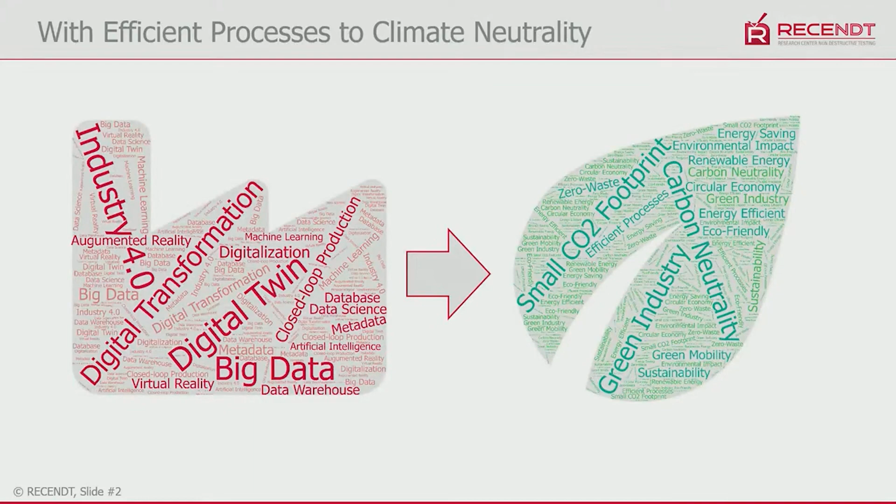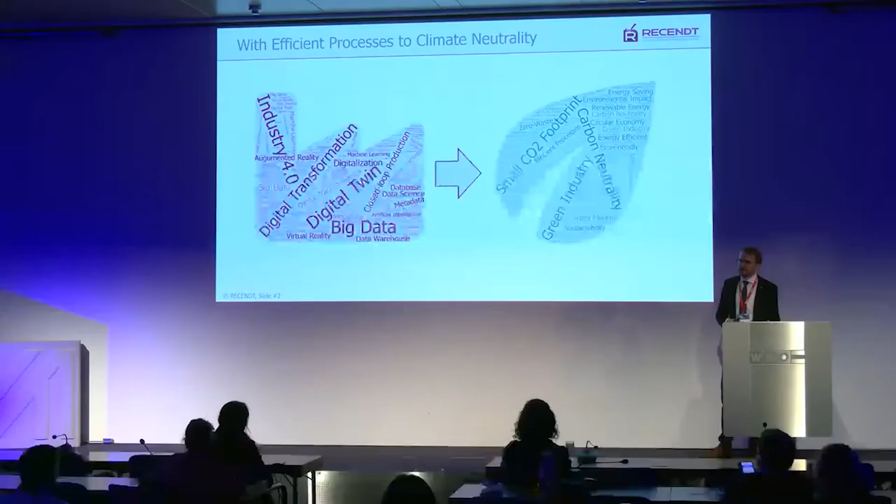In the next few minutes, I'm going to talk about contactless sensing technologies for enabling efficient process control. First of all, you probably heard from the last presentations and from the presentations from today several keywords from digital transformation, big data, regarding the industry, but regarding climate neutrality, you heard probably carbon neutrality, green industry, small CO2 footprint, and of course, circular economy.

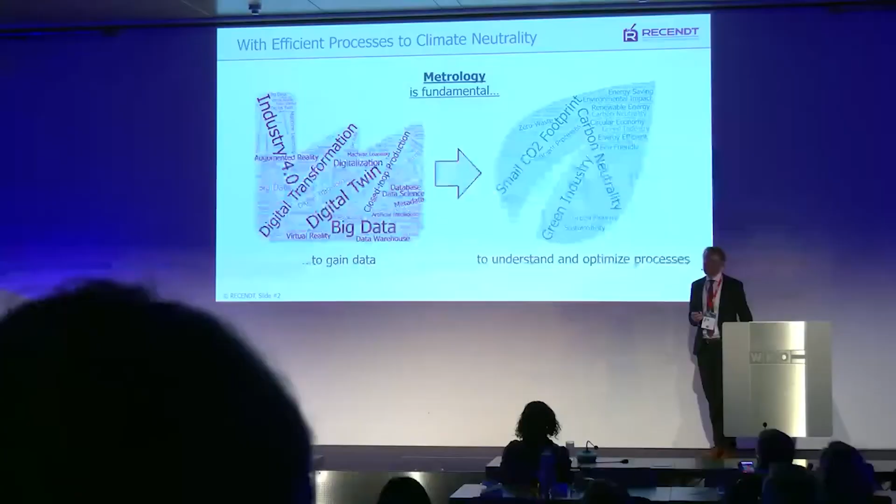And in order to reach that climate neutrality, one point is fundamental. Metrology or sensing is fundamental on the one hand to gain data, and on the other hand, to understand and optimize those processes. Our company is called RECENDT, and from the name, you already see our focus. We are a research center for non-destructive testing, a research and technology organization, non-academic,

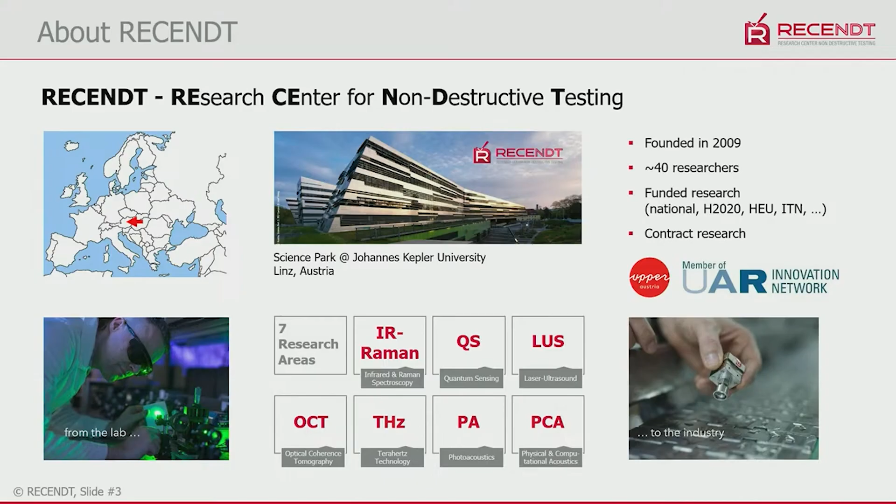which focuses on sensing technologies. We've got 7 research areas, from acoustic technologies like laser ultrasound and photoacoustics, over to optical technologies like infrared and Raman spectroscopy, over optical coherence tomography and terahertz technology. And since autumn last year, we also have a research group dealing with quantum sensing, which is quite an interesting topic. There's still a lot of research going on there, but that will be very interesting also for industry applications in the next years.

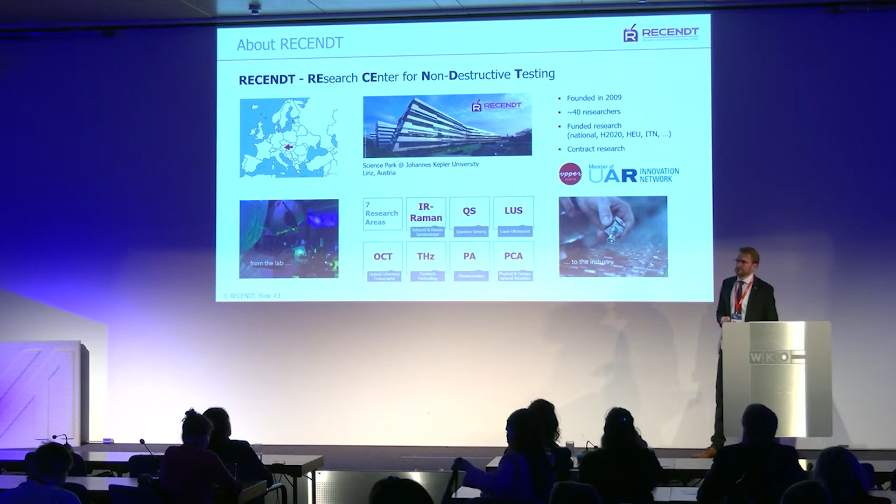Our focus is bringing those technologies from the laboratory to applications in the industry. And how to do that? Basically, we are offering quite a broad range, from proof of concept studies over R&D consulting. We're doing sensing development and prototyping in-house. We're doing the whole system integration, where we integrate our sensing solutions into your process systems in the industry. And we also offer measurement service, where you can send in your probes to our facility, and we analyze those probes, for instance, regarding microplastics.

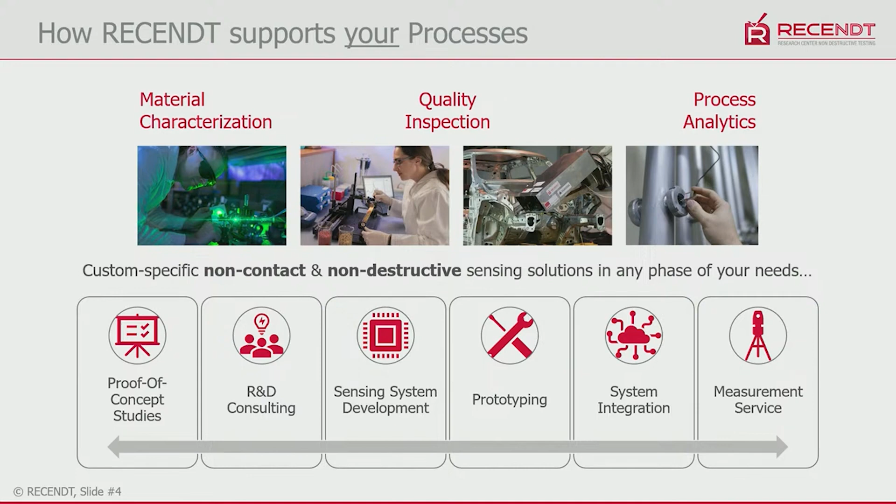As written on the top of that slide, we're dealing with material characterization, quality inspection, and process analytics, ranging from applications in a laboratory to the process itself, to inline applications, as seen on the right-hand side. But what they all have in common is they are non-contact and non-destructive solutions. Today I want to focus on one specific technology, infrared spectroscopy, since this is a key technology for inline process control and inline process monitoring.

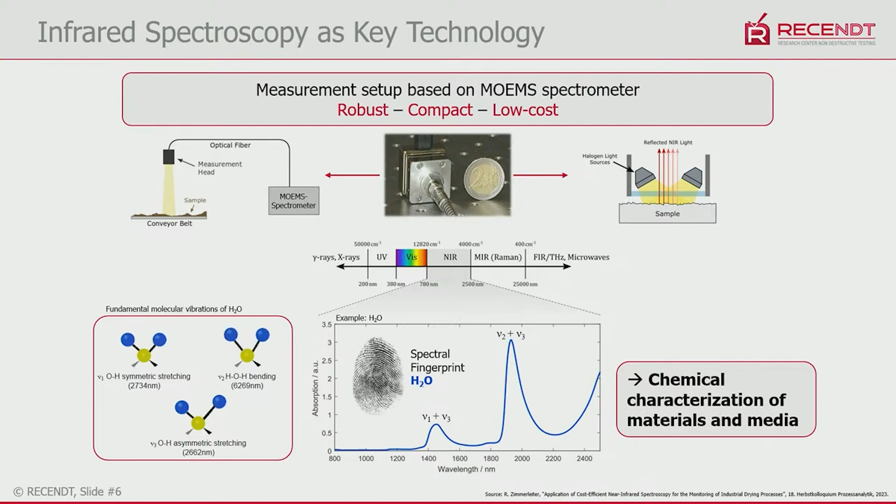Now I'm showing you some examples based on that technology. The first one is an inline monitoring of resin production, for instance for the production of melamine formaldehyde resins for surfaces or phenol formaldehyde resins for mineral wool. What we're doing here is an inline chemical characterization. At the company, in that case Metadynea, we're applying our microspectrometer downstream of the formalin tanks, and with that microspectrometer, we're measuring the concentration of formaldehyde.

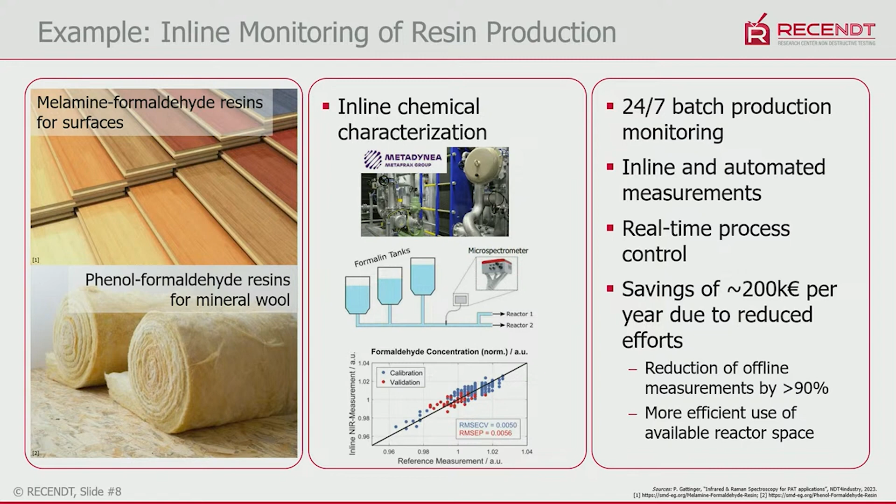Now we are able to monitor this production. That's a 24/7 batch production. Since it's inline and automated, we can also automatically do a real-time process control. With those advantages, we had a reduction of the offline measurements by over 90%, and in the subsequent process can also use the space of the chemical reactors more efficiently. With those advantages, the company was able to reach a saving of approximately 200,000 euros per year, which is quite a lot, of course.

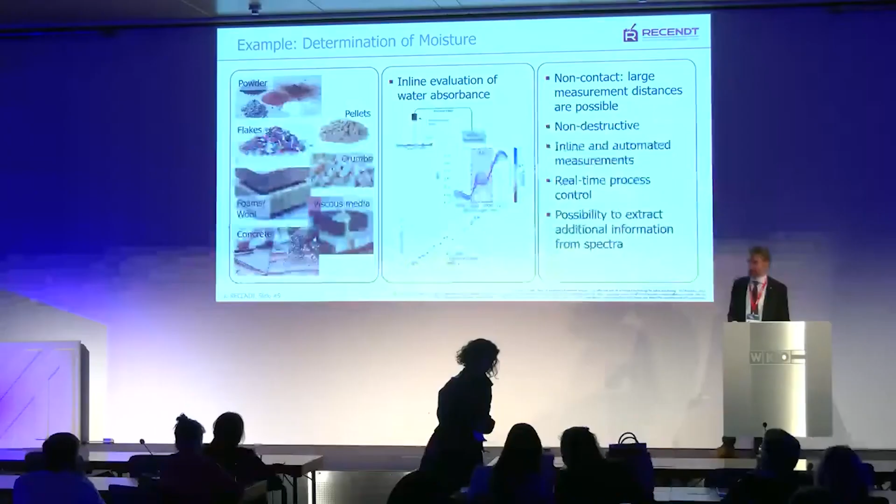We can measure that at various different media, from powder over pellets, flakes, crumbs, foams, or wool, but also viscous media, or for instance concrete. The big advantage is we are non-contact and non-destructive, so large measurement distances are possible. With this small measurement head, it's also possible to do that inline and automatable. You can use that data for real-time process control.

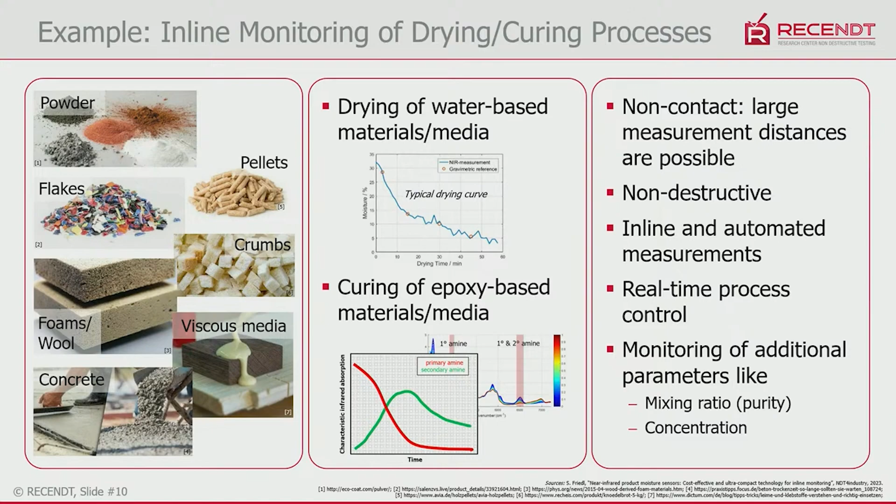That can be done for water, for drying processes, but we can also do that for curing processes, for instance curing of epoxy-based materials or resins, as demonstrated in the picture below. You can see the characteristic infrared absorption of the primary amine and secondary amine over time. With that data, you can determine the curing. In addition, you can also monitor additional parameters like mixing ratio or concentration with that technology.

Another example, semi-based on infrared technology, is the inline characterization of layers. We're using primarily optical coherence tomography and terahertz technology. With those technologies, we can determine the layer thickness and internal structure of various products or materials, like multi-layer films or sheets, laminates or vinyls, composites or hybrids, and multi-layer pipes.

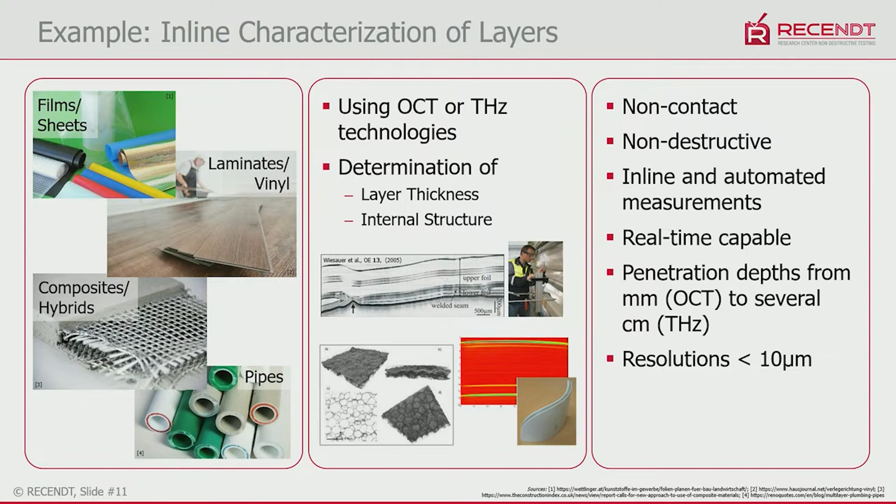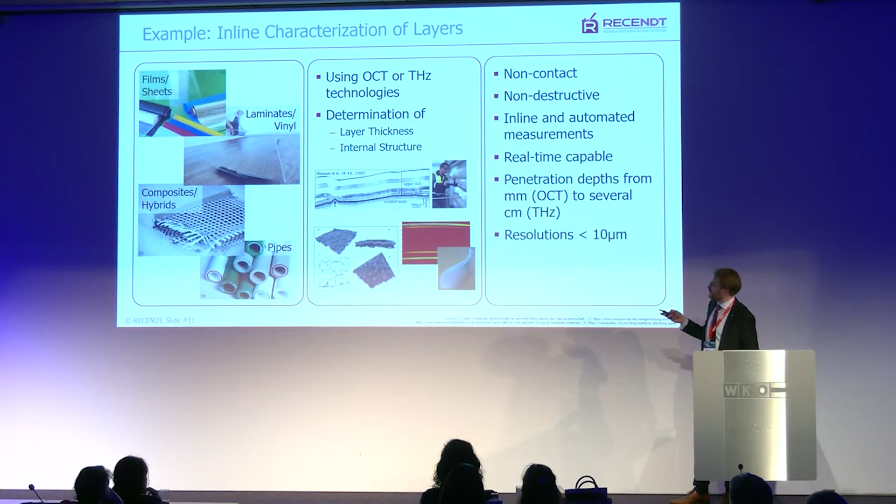Some examples are shown here, where a multi-layer foil is analyzed and you can see the structure, or here for a multi-layer pipe, or this picture where the structure of a foam is evaluated. With those technologies, we reach really high penetration depth, depending on the technology, from some millimeters to several centimeters, and really high resolutions down to some micrometers, which can be seen here in that foil. The scale here says 500 micrometers, so we can really see some very thin layers and characterize them.

The last example I want to show is the detection of contaminations. This is now an example not for inline process control, but for offline quality inspection. We can identify and characterize those contaminations by localization, chemical identification, and quantification on several materials, like soil, textiles, or foams.

Sorry, that was one page too fast. Here, exactly.

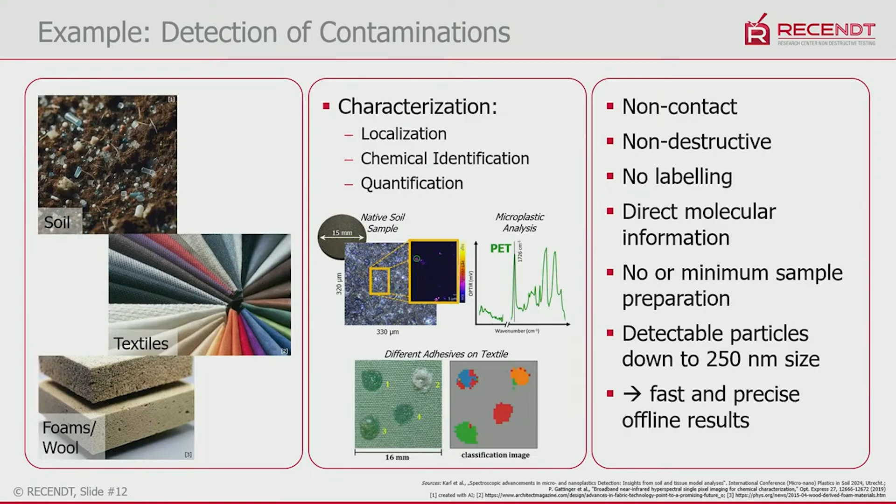One example would be the analysis of microplastic in soil. What you can see here is a soil sample, quite a small one. From that soil sample, we can look at a region of 300 by 300 micrometers. From that region, we can zoom in and see particles down to 250 nanometers.

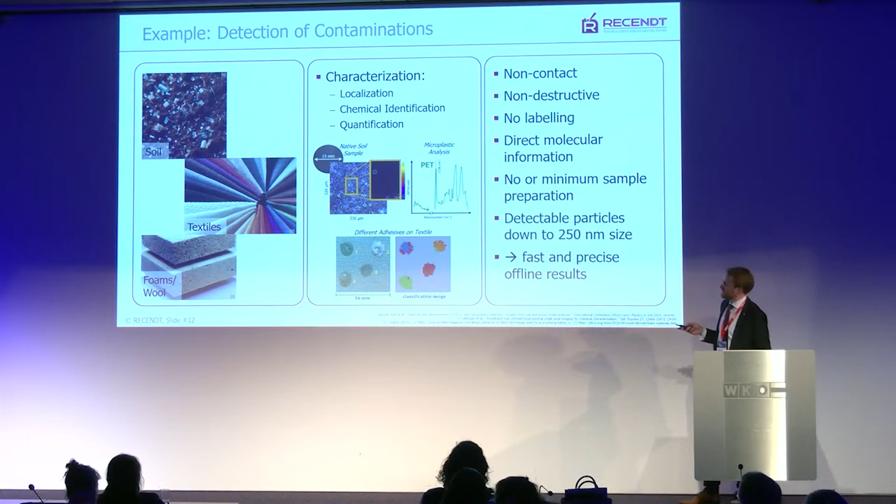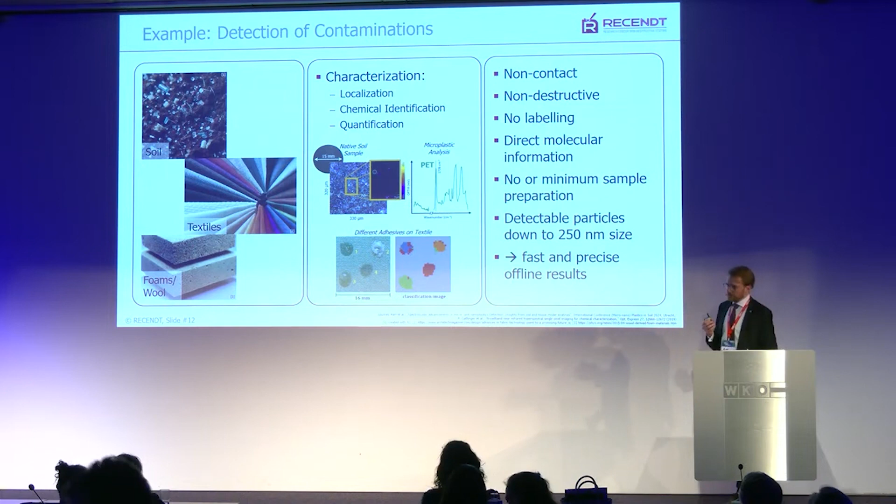We can identify which plastics are within this region. For instance, here PET is identified in those bright regions, which are quite small. Or here, different adhesives on the textile - we can identify which adhesives, localize them, and quantify how much adhesive is applied on that textile. With that technology, we are able to produce those results quite fast and precise.

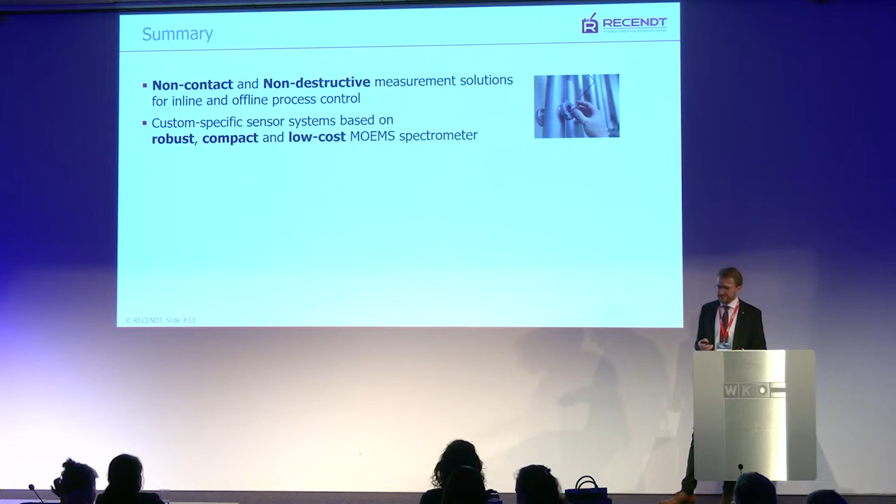So I'm already coming to the conclusion and summary of today's presentation. I showed you some examples for non-contact and non-destructive measurement solutions, mainly based on custom-specific sensor systems, built on small spectrometers which are robust, compact, and low cost. I showed some applications mainly for the chemical industry and construction industry, but these examples can also be applied in many other industries.

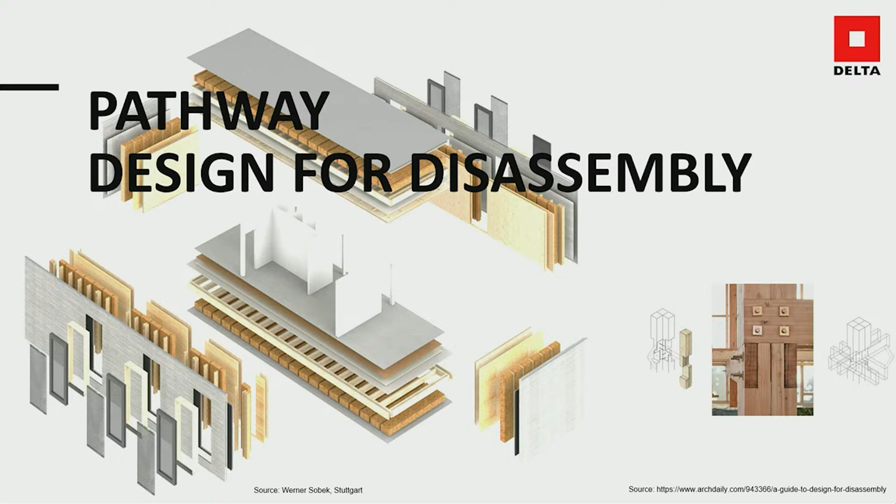Coming to challenge number 1: design and planning. Traditional construction practices are often linear, with little consideration for end-of-life material use or recycling. Shifting to a circular model requires a fundamental change in design philosophy to prioritize modularity, adaptability, and the use of recyclable materials. What is a pathway? Designing buildings and components to be easily disassembled. This is a major challenge, because it's not just finding the right materials, but also implementing them in the design process. We at Delta, for example, have developed our own approach, supporting our planning team with individual experts from the integrated consulting team and special tools and software.

What is the pathway? Prioritizing materials that can be recycled or reused, not only reducing waste. Here you see a good example by Werner Sobek from Germany, who is pretty much into that topic. He designed a building with reused elements and recycled materials.

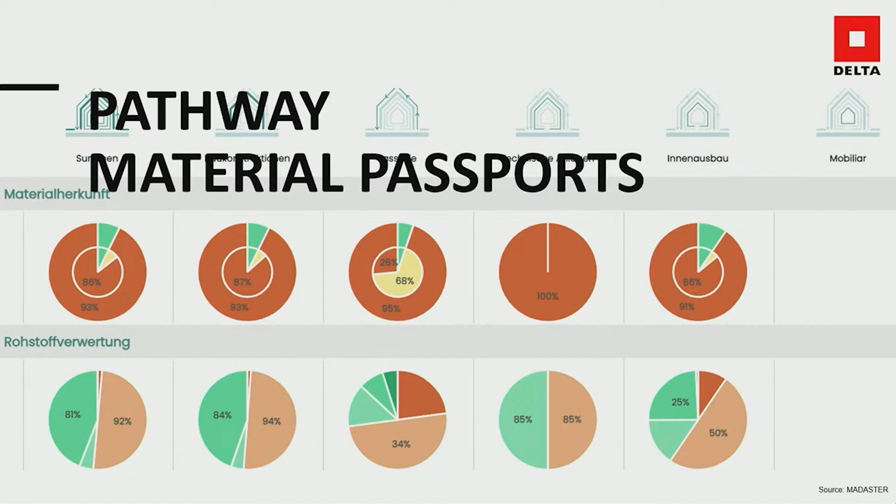What will be the solution, or the pathway? I guess that's the most important one we have to work on: material passports. Implementing material passports that detail the composition and reuse potential of building materials can facilitate their recovery and repurposing. Meanwhile, it's a must when you prepare green building certifications with DGNB or ÖGNI, and they already do so.

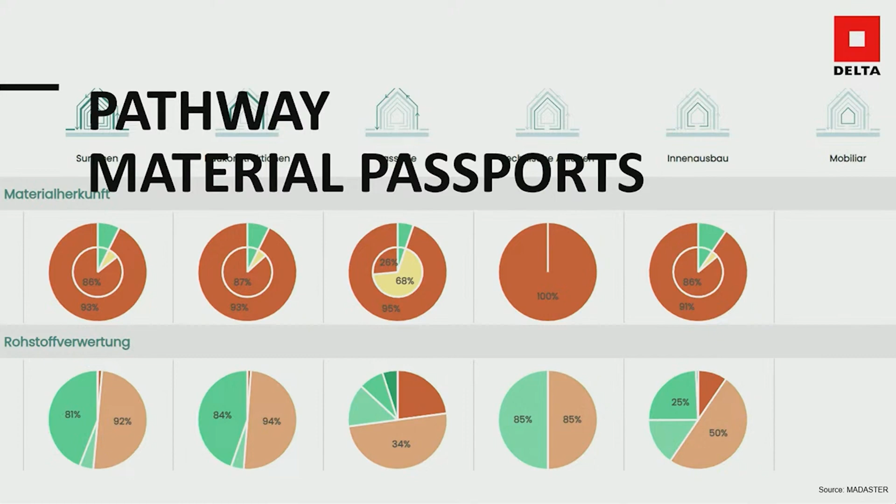You can do it on an Excel sheet, but this tool I'm showing you here is based on a BIM model, and this BIM model is read into Madaster. It's a great tool, meanwhile well known internationally in 7 countries in Europe, and helps many stakeholders in the industry focus on their circularity index, which is also driven by EU taxonomy. You can do life cycle assessments to evaluate your global warming potential, and the CRREM path, the Carbon Risk Real Estate Monitor.

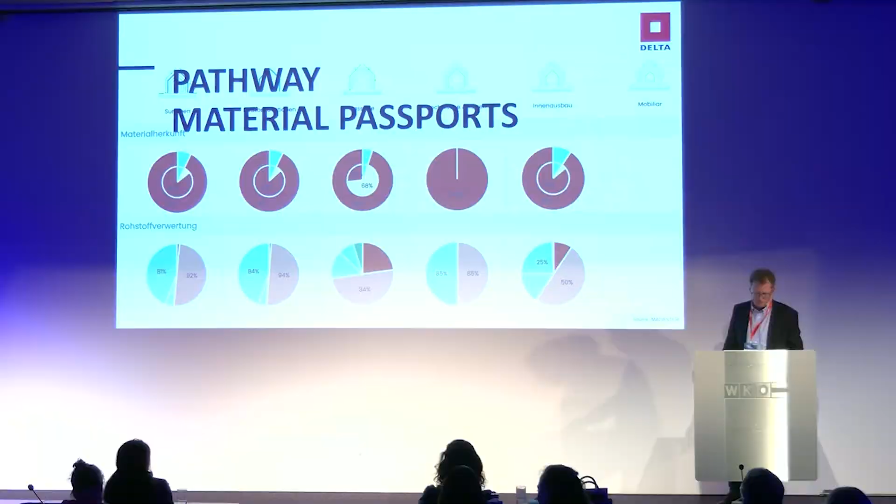And even better, it hopefully one day will give us a platform that helps us deal with reused materials, with an urban mining screener that gives you a regional database of the materials you can actually reuse in some of your buildings.